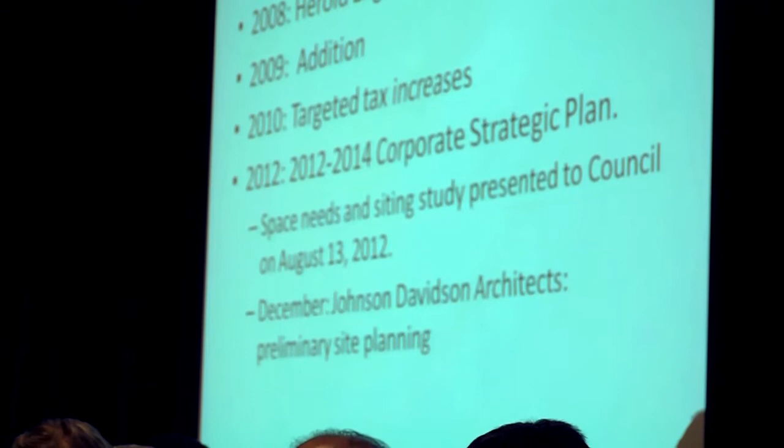In April 2013, we saw a plan very similar to the one we see today, although with a lot less detail. For those who were at that event, some of what I'm saying now may sound like a repeat, since we already knew what the problems were with the hall, so we're just going over it again.

In July of this year, Johnson Davidson Architects was awarded the contract for continuation of this work. Also on July 8th, Council formed this fire hall working group, which Walter Hoogland will discuss more later in the presentation.

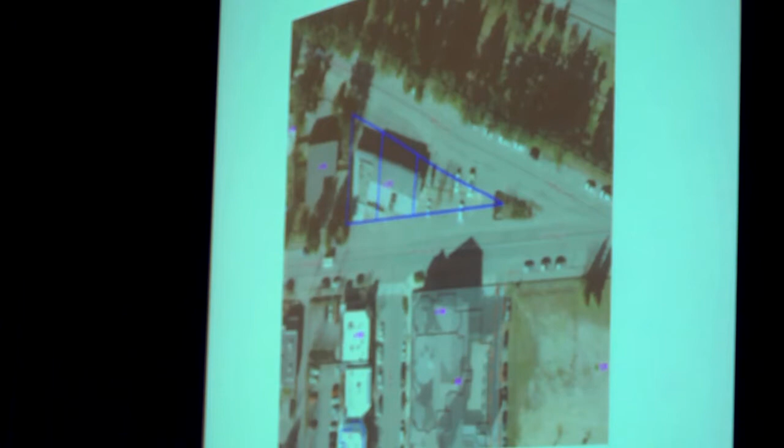Moving on to the discussion of the existing hall. Everyone probably knows where it is, but I prepared this slide for reference. Here we are - it's across the road from the town hall. It's been in this location for almost 70 years, not the same size certainly, but in a number of iterations along the way.

The challenges to this existing hall - we don't need to dwell on them in detail, but we want a fire hall that will still be standing in the event of an earthquake, and that's the first major failure at this hall. It's not up to seismic standards, and it's not what we would consider a post-disaster structure.

The location is also an issue, and Bob Weir will probably touch on this later in his portion of the presentation. Given its location downtown, access is quite limited. The firefighters pull the trucks out onto the road just to wash them. During special events, access is sometimes limited or they simply can't get to it. That's not the ideal location for a fire hall - you want easy access to it.

The power backup for the fire hall is a portable generator. Obviously that's not a good long-term solution - maybe for a house, but not for the main fire hall of a community our size. The communication system is also lacking. If the power goes out, we can send smoke signals, but they'll be putting them out.

On size - a space needs assessment has clearly indicated that although this fire hall was the right size for the community when it was built in the 70s, it's no longer the right size. The fire trucks have grown, we have more volunteers, and it no longer meets the needs of the fire department. We need a bigger hall with more room for the apparatus, and the spaces could be more optimally configured. Kim will discuss that further in her presentation.

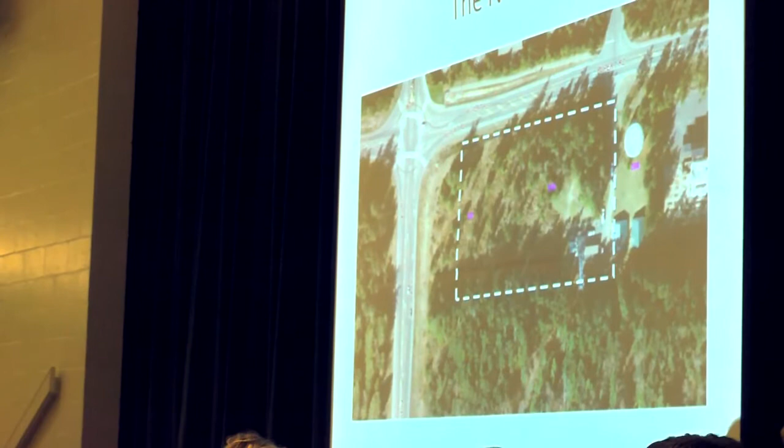This aerial photo does not have the roundabout on it, however we have a bit of the outline of the roundabout. Just the traffic calming effect of the roundabout at this location provides like a low-speed point of access for the apron to leave the fire hall site. So this is a good thing, it's very easy for us to control the traffic.

The other traffic will be stacked up here or perhaps on the inside of Berwick, so the fire department can leave and do whatever they need to do. There's good sight distances in all directions and low speeds. As Luke referred to, the size of the site provides ample opportunity to have training on site, and we see this as a huge benefit.

The co-occupation of the site with the major water storage reservoir and the booster pump station gives us an ability to utilize geothermal heating for this building and achieve long-term efficiencies in the operational costs. This is already a technology we've piloted and have in place for the booster pump station on site. The difficult part of geothermal energy is trying to get water out of the ground so you can extract some heat from it. Well, our water department does that all day long.

We produce typically in excess of 1 million gallons a day, sometimes several million gallons a day. It's very easy to just divert a little bit of that water through a heat exchanger, and we can use that to heat the building. So that brings us some long-term operating advantages. Timber from the site can also be harvested and milled and used in the various architectural finishes of the building. We're hoping to see some of that.

Now, in looking at the site, some of its advantages can also be seen as disadvantages. This is an undeveloped site, so there are going to be associated site development costs with it. It's a large site, and if we want training on site, we're going to have to build it. So it's a negative, but it comes with a positive.

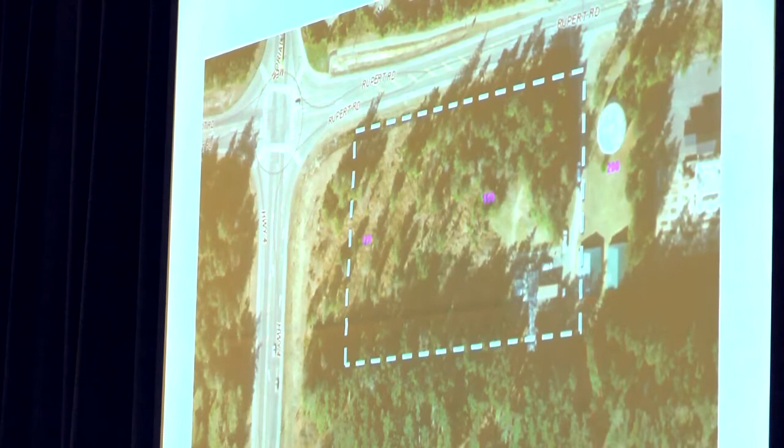And I had just prepared a few notes on Walter Hoogland. I don't know whether the last meeting was appointed or not, but anyway, I'm just going to take a minute to introduce Walter.

Walter Hoogland was appointed by council to be the project manager for the new Fire Hall project. Walter is an upstanding and accomplished member of our community. He's resided in Qualicum Beach for 13 years with his wife Marilyn, and he understands the community well. In 2011, he received the Above and Beyond Volunteer Award. In 2009, he was Qualicum Beach's Volunteer of the Year. He has chaired the Fire and Ice and Family Day committees. He served on the Qualicum Beach Advisory Planning Committee and is currently involved in the Kiwanis Affordable Housing Society redevelopment initiative of First Avenue.

Walter has 40 years of experience in construction development, and claims to be semi-retired as a project manager for both building and civil contracting. He's built commercial buildings, schools, shopping centers, care facilities, and closer to home, he was the project manager for the Qualicum Beach Memorial Golf Course Clubhouse, the RDN offices in Nanaimo, and Family Place, Arrowsmith Lodge, and Coakley Manor in Parksville. Council recognized that Walter would ensure the project be carried out in an efficient manner and that the community would get good value for money.

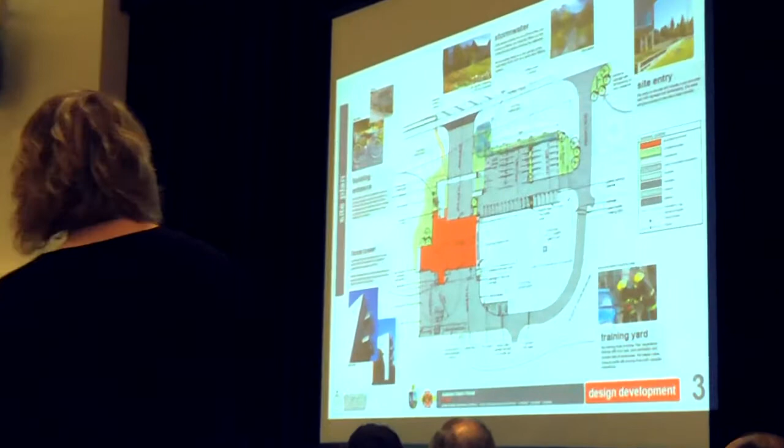I won't take over a whole bunch of your time here, but I will start by taking a look at the site plan. Last time you saw us, we'd been looking at various versions of where to put the building, how to access it, how to make sure emergency vehicles can get out to the road the way they need to be, and how we make sure there's no conflict between the public coming to the building, volunteers coming to the building, and those emergency vehicles leaving. What you see in front of you is the design development version of that. We've taken it into this next stage, and I'll just walk you through the site a little bit.

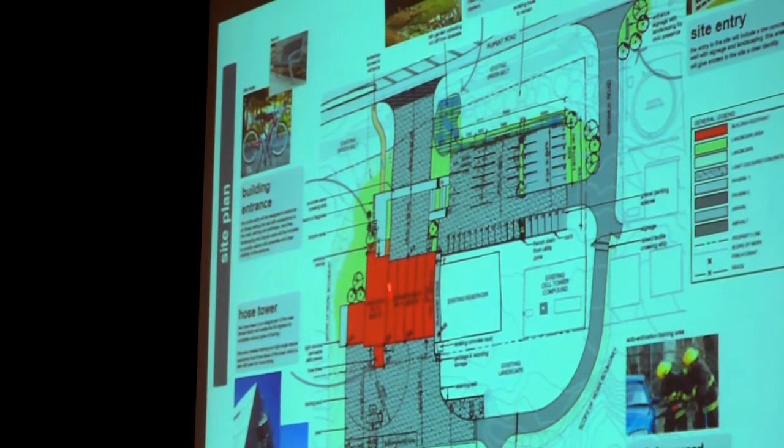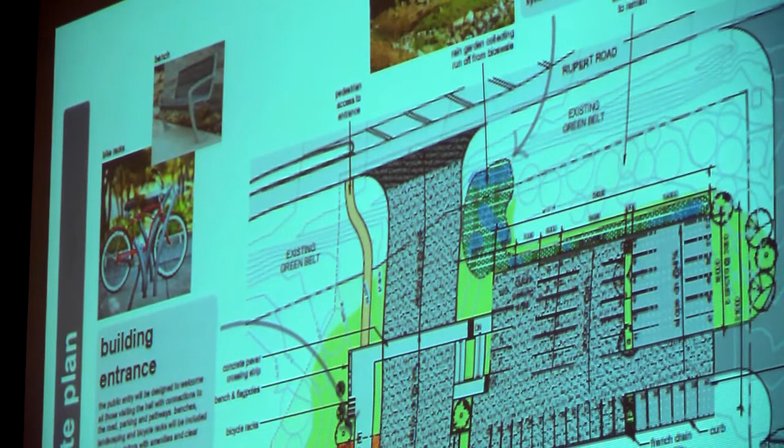What you see in front of you here is we have two exiting and entrance points off onto Rupert Road. The apron, the front apron, is where emergency vehicles only will exit and sometimes return back into the bays - it really is a fire department only kind of access. What it needs to do is make sure we have enough of the grade to get us down to the road very quickly without causing any bumps or obstacles along the way. We need to make sure we take you straight out perpendicular to Rupert Road so those emergency vehicles can take off in either direction without endangering public safety or the safety of the fire department.

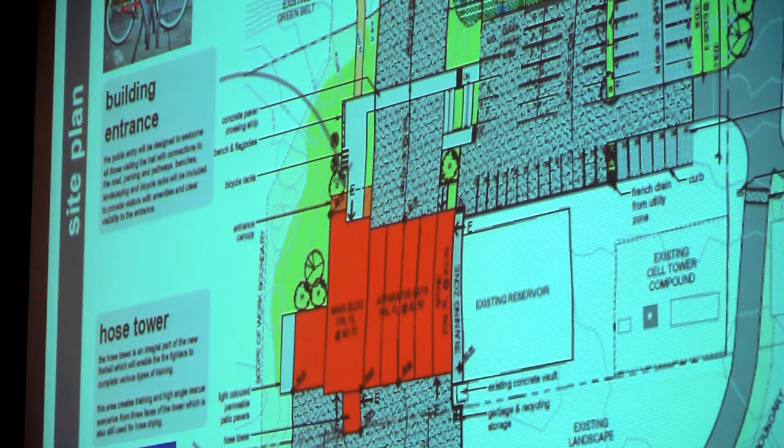One of the keys to all of this is positioning the apparatus bays, which you see right here, located just adjacent to the reservoir. This represents the existing water reservoir, and what we were trying to do is make sure we tuck the building as close to this as we could, because we're actually going to use it to our advantage in the very near future when I jump into that for training.

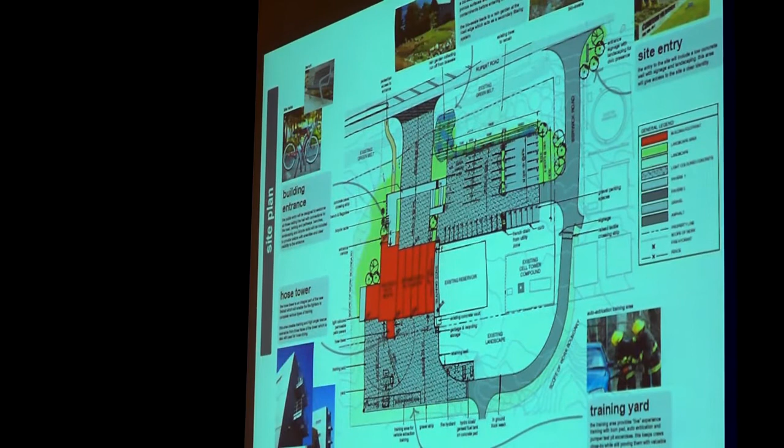It's also built to post-disaster standards, and it's very important to remember that's one of the key issues in the difference between the fire hall you have now and the fire hall that will be built as a result of this proposal, hopefully. So what that means is the building is actually built to 1.5 times greater a seismic force than your average building.

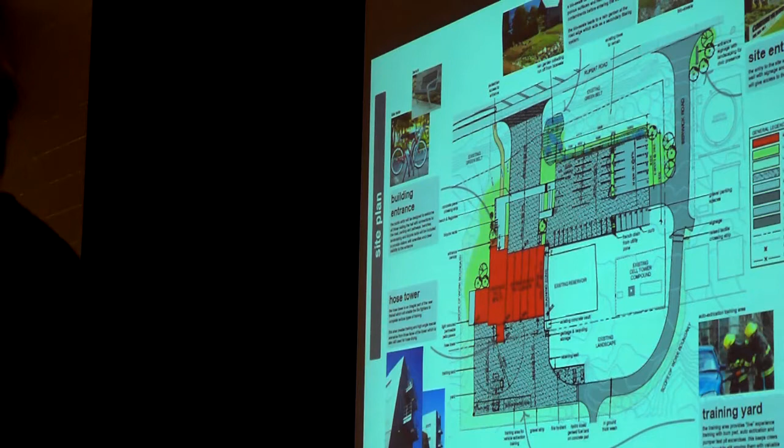So the building you're standing in now, some people may say, well, why don't we use this for training? Why don't we use this for various functions the fire department can use? Well, we want to make sure that when an earthquake happens, the building is still standing. This one may be, it may not be, but that building will be. The idea is we design it to those higher seismic forces to make sure people can get out, fire department can get out to help all of you, but also that the building itself is standing and still useful.

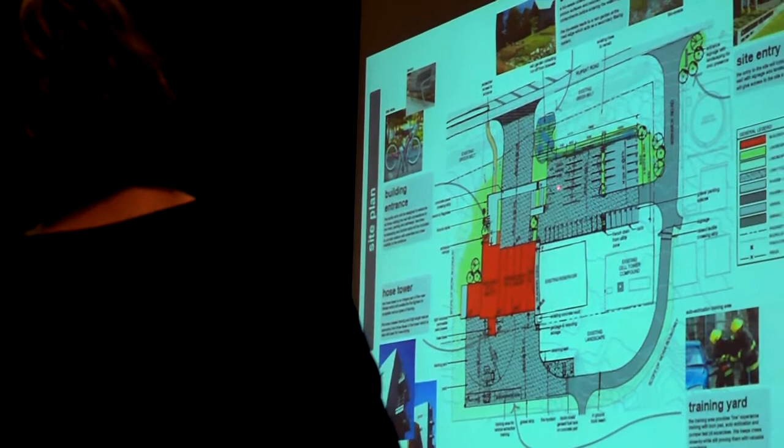In addition to that main exiting, and sometimes return for emergency vehicles only, we have the access to the site. The reason we separated these is we wanted to make sure there was no conflict between volunteers arriving - the parking you can see adjacent to the apparatus bays, so they come quickly in through this door - and that's also where the public will arrive. So there's no conflict with people arriving and exiting through the same entranceway.

Sorry, can you go on the other side? Sorry. Oh, you're gonna - yeah, not good.

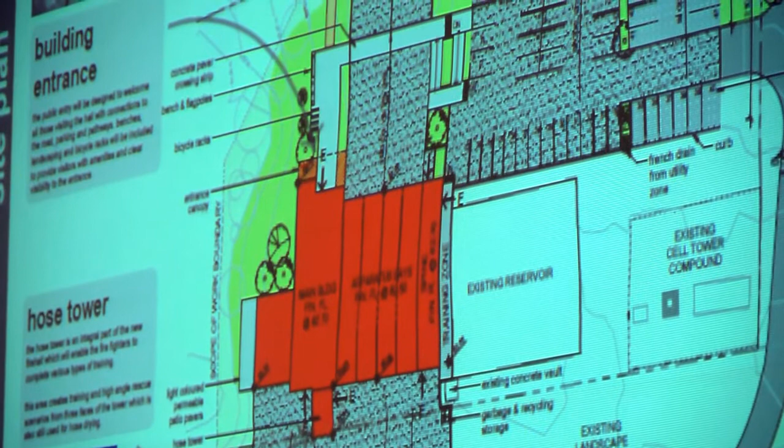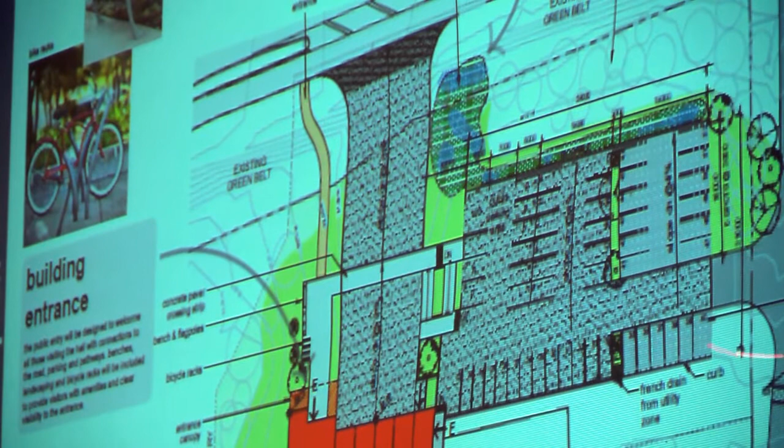What we were really focusing on here from a planning perspective is trying to make sure that this green belt was kept intact, so we want to use a lot of the existing landscaping that's there now. We do want people to come to the site through the secondary entrance and this continuation of Berwick Road, which will eventually take us back to the training yard.

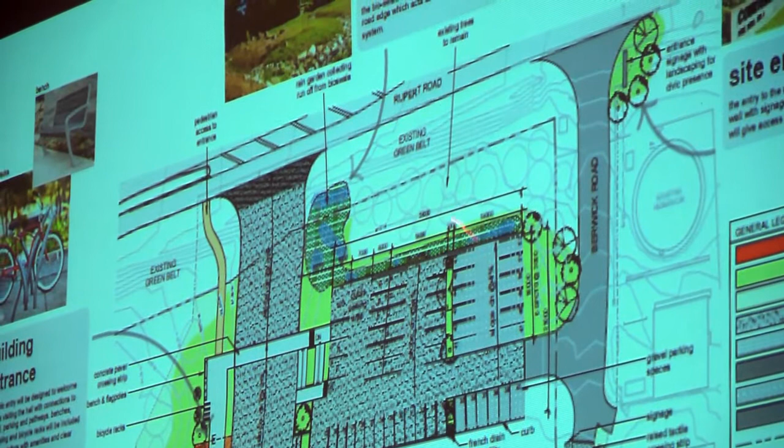So we've got parking towards the front, quick access for volunteers into the bays, parking for the public which takes you across the bays and directly into the entrance, and then a training yard towards the rear of the hall. This looks at taking the more industrial side of the fire department and their training and placing it away from where the public accesses and away from where parking is, keeping it towards the rear of the hall. This is also where we've located the hose tower.

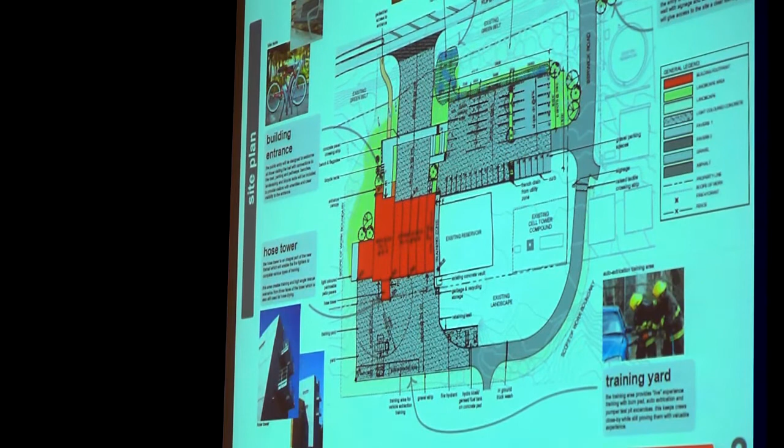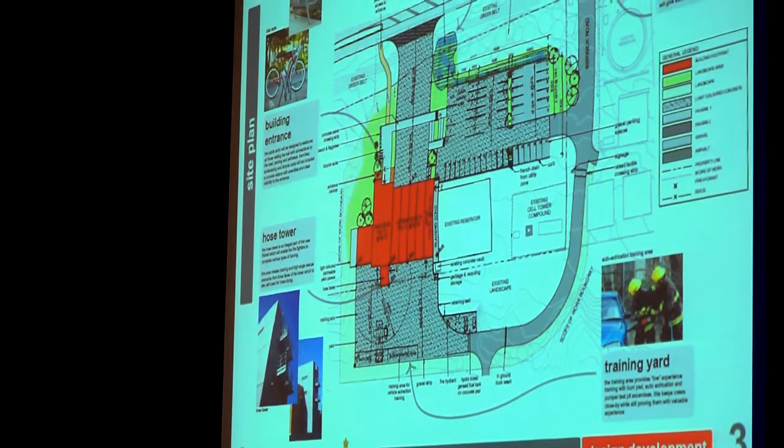The hose tower is traditionally used for hose drying, which it still is, but it's also got a multi-purpose use. So we will design the interior for that to have confined space rescue within the shell of the hose tower, but 3 sides of that hose tower will also be used for training for the fire department, and they'll be able to use it in a variety of ways. We'll design it with certain obstacles that suit their needs in order to make sure that training on site can be as effective as possible. We also need a certain distance off that hose tower, 20 meters, to make sure that vehicles can be positioned around the hose tower, and again, that training can take place.

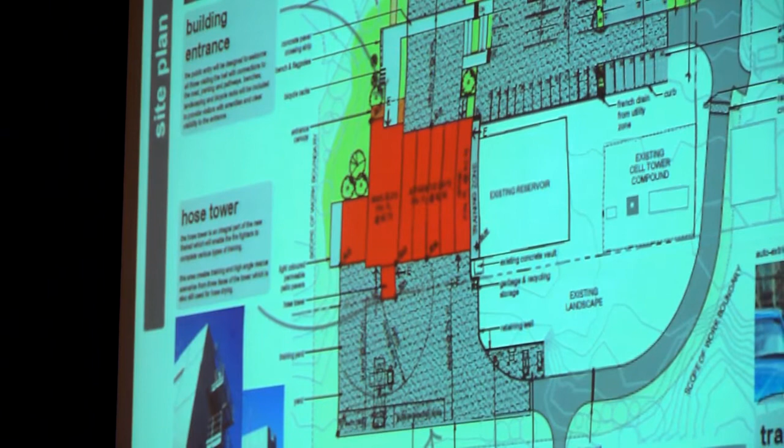A little bit more, we have some of the services back here as well. This is a very key portion here, the emergency gen set. Unlike the building that you have now, this building will be served by an emergency generator that will run the entire building if power is down and services are down. So we have a gen set here, we'll run that right now for 72 hours without refueling.

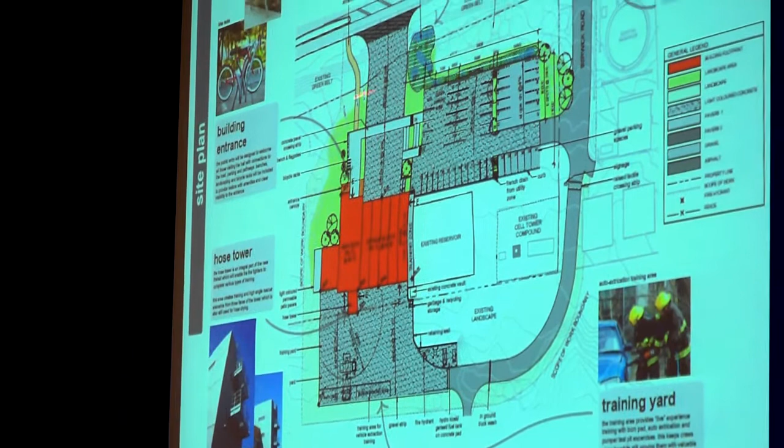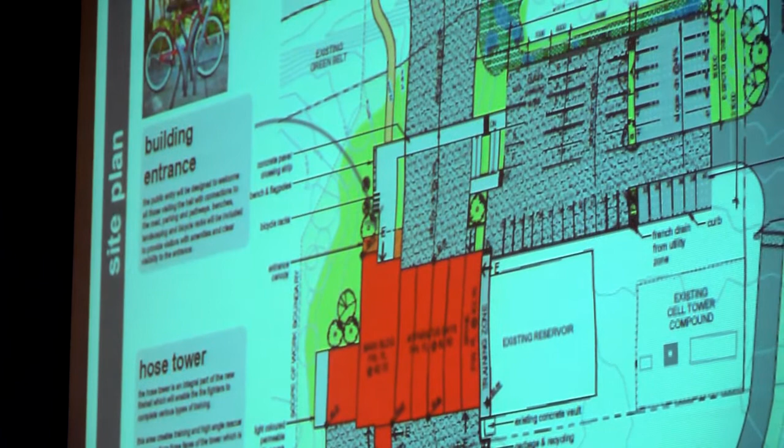We've also tried to create a nice public entrance towards the northern side here, which gives us access to the road, but also access to parking here. The distance between that pedestrian walkway and the apparatus bays is 20 meters, which gives the fire department enough time to get out of the bays fully, doors could drop, and not infringe on the pedestrian walkway across the apron. So there's a good distance there for pulling vehicles out of the bays and washing them, doing maintenance on them, which means these guys are sitting in the middle of the road right now. In this case, they'll be able to sit on this first part of the apron without impacting the pedestrian walkway and then head out onto the street in a safe manner.

How do we operate this guy?

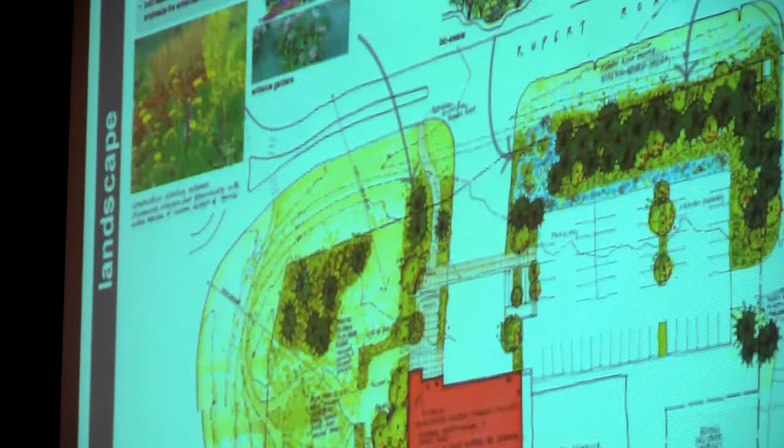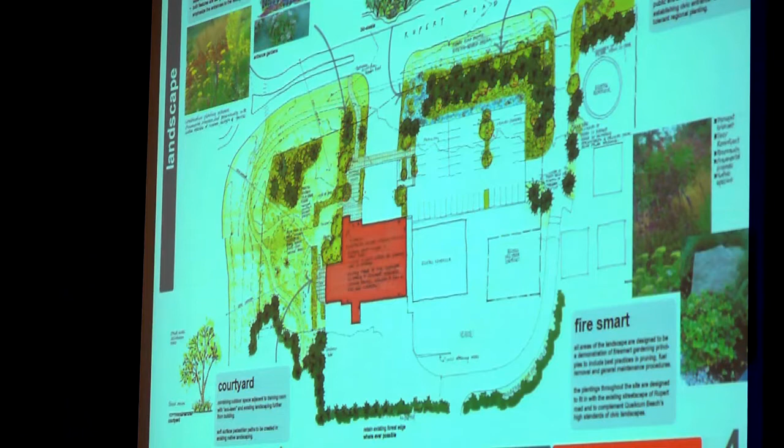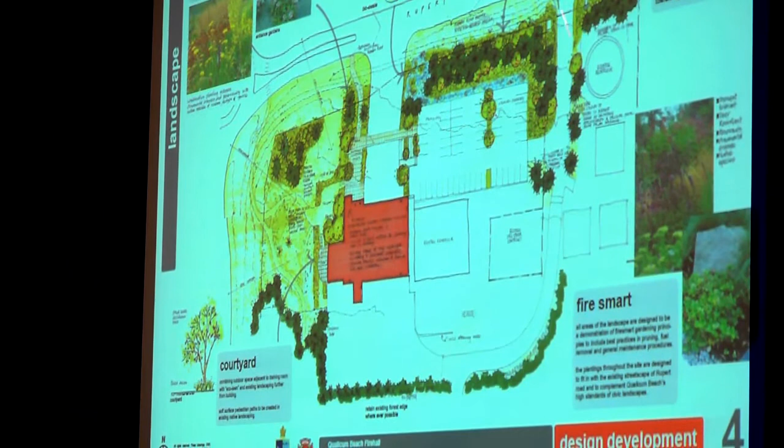I won't go into this in too much detail, but Victoria Drakeford is here as our landscape architect, and she will be able to take you through the landscape plan in detail. What we really wanted to show here was that we are focusing on trying to keep the existing forested areas on the site, but also, where we have created development, enhancing that area through rain gardens, using drought-tolerant planting, regional planting, and trying to create this as a bit of a demonstration area. We'll also be making sure that our entrance to Berwick Road and the entrance to the parking in the fire hall on this side will meet the town guidelines and ensure a nice civic entry as you approach the building.

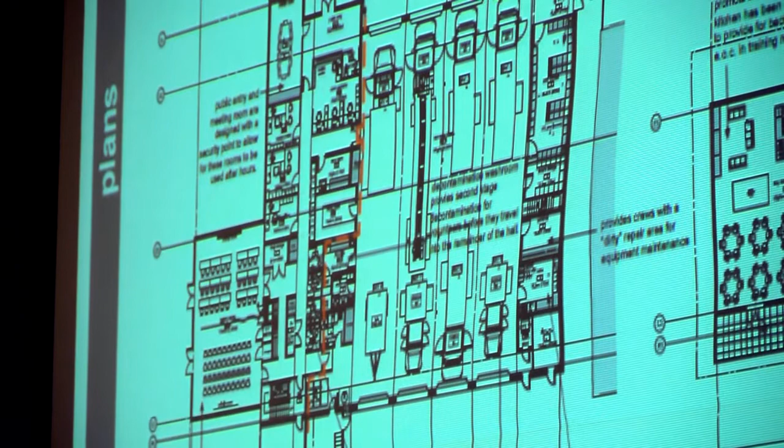Okay, onto the floor plan. As everybody before me has said, the floor plan has taken some time to develop, and the reason for that is because it has been really well tested. Each member of the group, or each faction of the group especially, has had different concerns. That's the great thing about working in a community group, you are able to ensure that everybody comes with a different perspective and tests the plan as it comes together. So each one of these spaces has really gone through quite a good rigmarole as the building has begun to take shape.

As I said before, one of the key elements is making sure that we have apparatus bays that are big enough for the current vehicles and for those projected to come, allowing the fire department and their crews to get around those vehicles really safely.

I don't know if anybody had a tour of the existing fire hall, but you can see now that fire engines are tight to the front. There's no room to get around them, and equipment is stored inside the bays.

One of the goals here with these bays is to ensure that they can store different kinds of vehicles in different positions, so vehicles can head out through the rear yard or through the front as well, but there's also room to get around them, to maintain them, making sure access for those vehicles is safe and fast.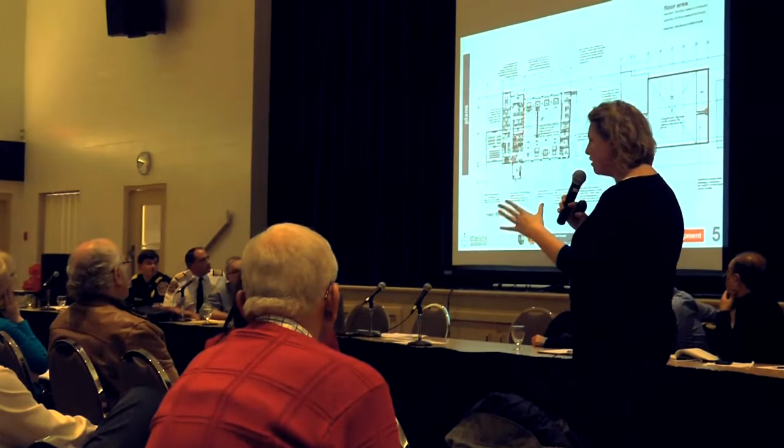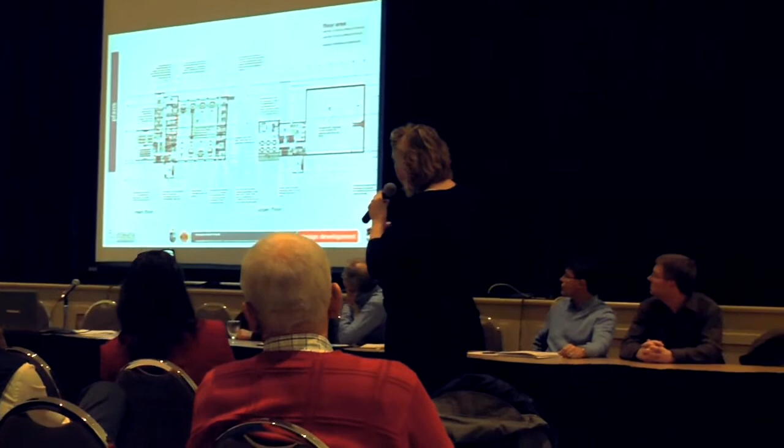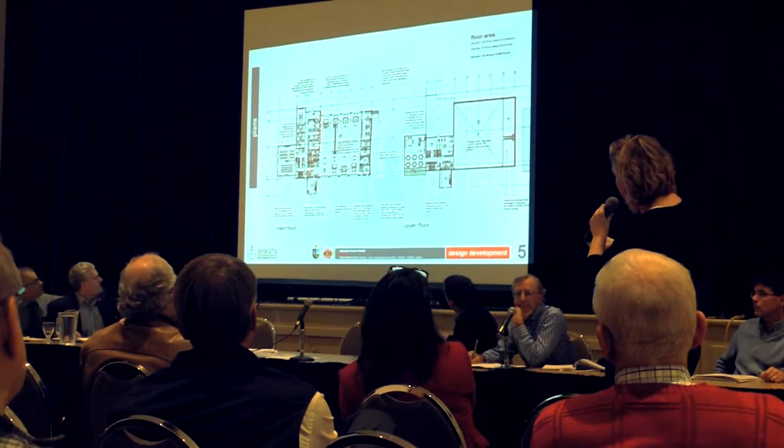In addition, what you see along the left-hand side here is what we call the spine, and those are some of the most important operational spaces for a fire department. Right now, gear storage is actually stored in the bays. What we do here is, in order to keep contamination down, we have a room directly off the entrance that volunteers come through from the parking area, which takes them right into gear storage. So we have a rip and run, or dispatch area, right here, directly into gear storage.

All that room is controlled from a humidity perspective, so they have racks where the turnout gear sits, and it can dry out while in the room. It's expensive equipment, so we want to make sure they have the opportunity to maintain it. Grab your gear through the second door and out into the bays.

What we really want to do from a structural perspective is, although we do have some columns, make sure there's a line right through the center of those bays to get everybody from gear storage straight through the bays into whichever vehicle they need to go to.

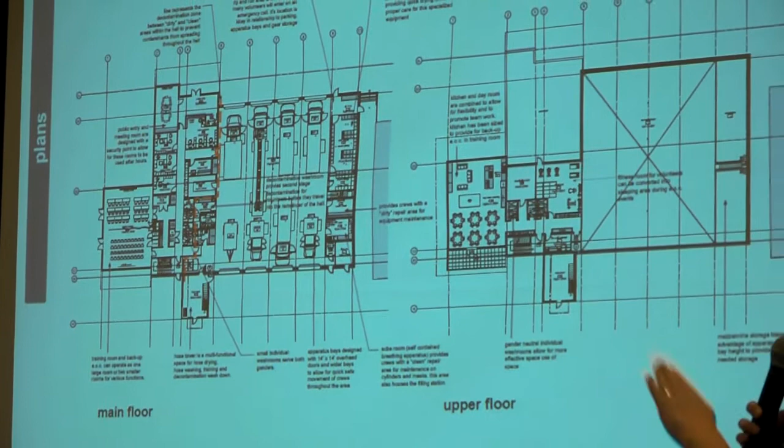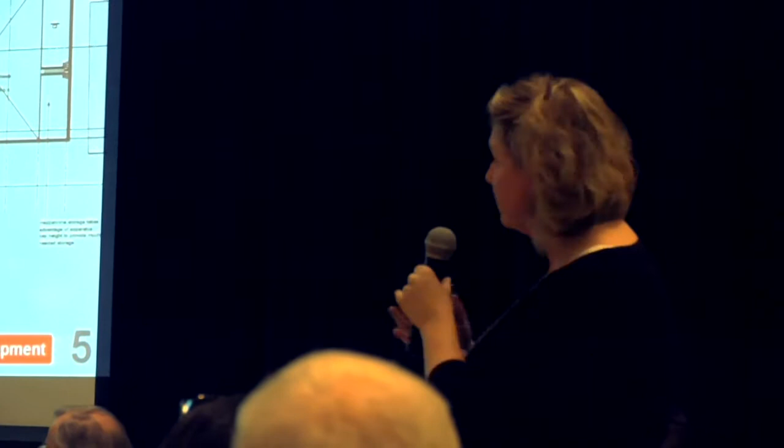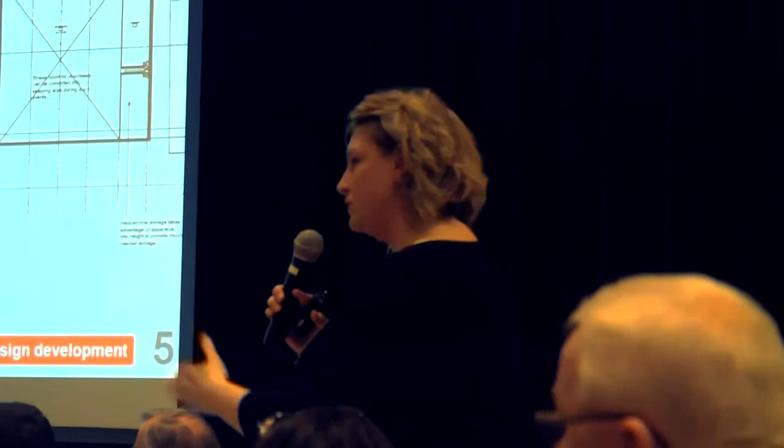In addition, one of the key things for the future is making sure we have enough room for additional gear storage if it's ever needed. One of the things we do here is position a storage room directly adjacent to the gear storage, so that in the future it can be expanded very easily. Otherwise, gear begins to go out to the bays, you lose your decontamination, your bays become cluttered, and you lose that advantage of keeping things well organized, clear and clean.

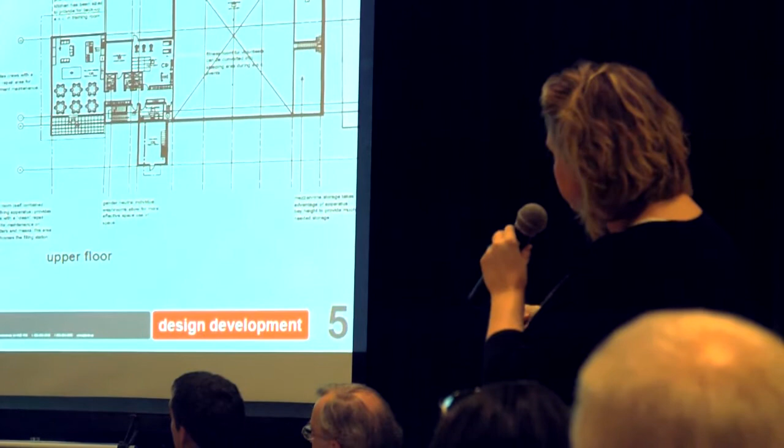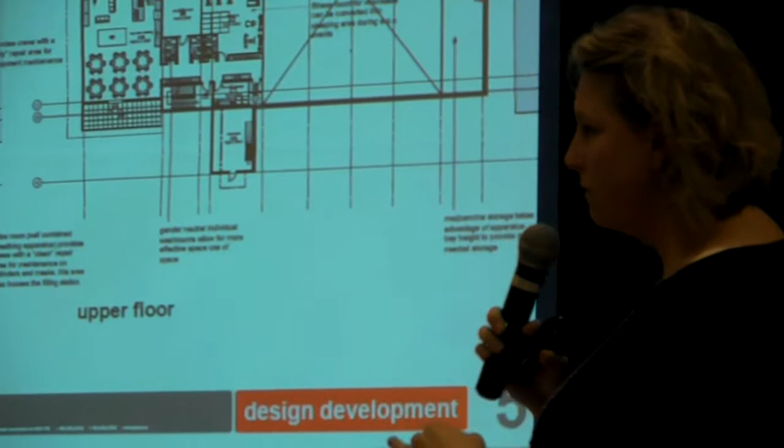In addition, two key spaces along this side are the workshop and the SCBA room. SCBA looks after breathing apparatus - it gives these guys a small room, but it's what we'd call a clean room. It gives them the ability to fill cylinders, maintain their masks, hang them, wash them, dry them. Nothing elaborate, but enough room to do that and deal with the equipment they have here.

Again, to fill bottles they have a filling station, to take care of that aspect, which they don't currently have.

The workshop side, just above here, is a smaller room, but it allows for sort of dirty maintenance. We don't want to mix the two - we want to keep decontamination separate and make sure they have a clean room to do what they need to do in. The workshop is for general work on the trucks, work on the equipment - things that might take them and their equipment out of the hall can now be done inside the hall. Again, not a big space, but enough room to do what they need to do for years to come.

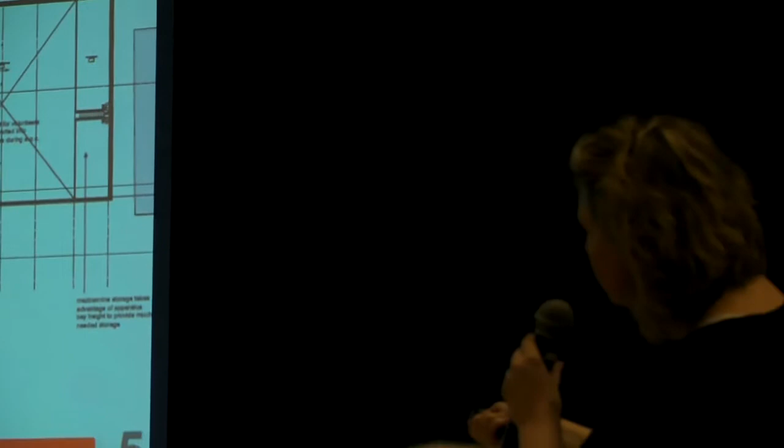They can do that in the hose tower, which has a wash down, and then they have a utility room, which has a gear washer. Take off their gear, put it in the gear washer. There's two small washrooms here, called decon washrooms, directly adjacent to the apparatus bays. There's a shower in there, lockers for a change of t-shirt and shorts, meaning they've had a second stage of cleaning.

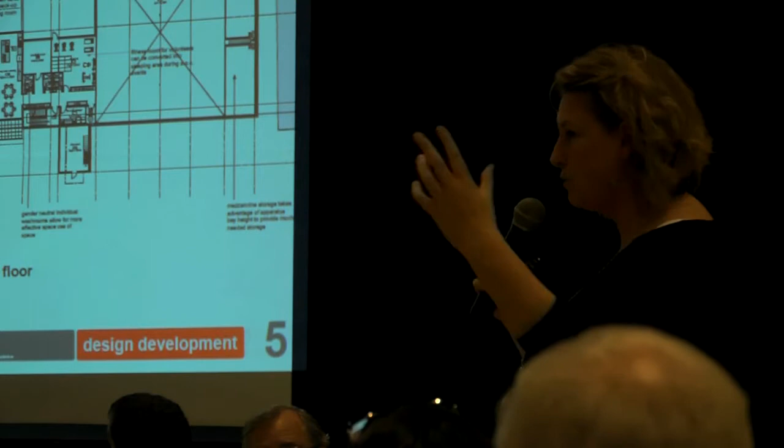Then they can go back into the clean side of the hall, head upstairs, shower down again. Don't go back to your families with contaminants on you, you're not spreading it into your own car. It gives them the ability to walk through those stages and become decontaminated, basically, as they move through the hall.

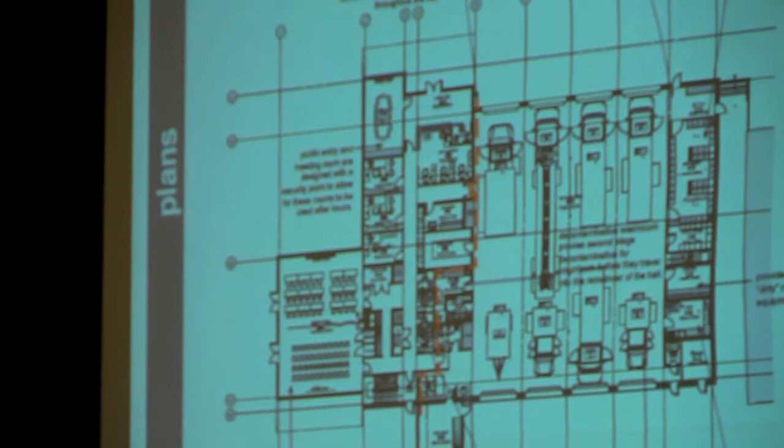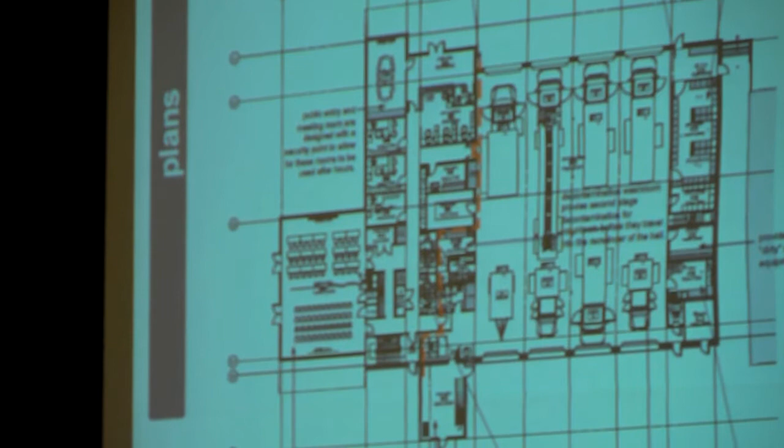So adjacent to that, we describe some of those spaces. In the hall portion, what we're looking at here is a suite of rooms at the front: a small meeting room, reception, an entryway, and a security point. This enables the group to shut down the hall and let other groups access that space at the front without the fire department having to be present, or even if they're there and get called out, the rest of the hall is secured off so nobody's wandering through equipment or taking the trucks out for a ride. So that gives them the ability to operate that, and that would be city or town-wide as well.

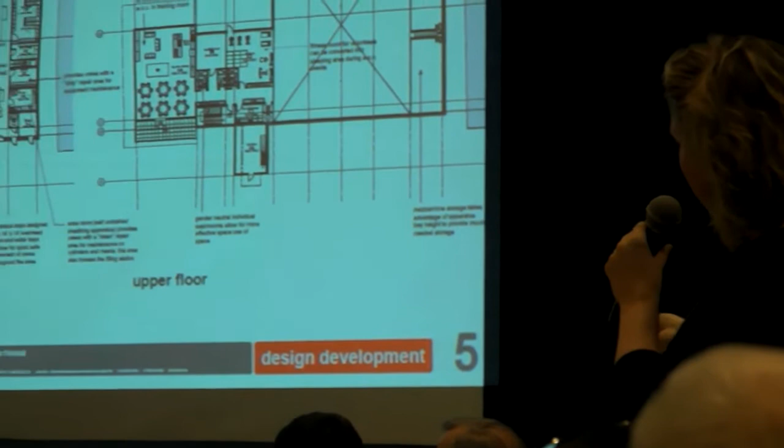A couple of small offices here for full-time staff, some workstations, and then we're looking at a training room. The training room operates not only as a training room for the fire department but for other uses and other groups, and it also acts as a backup EOC. It will be outfitted to act as an emergency operations center.

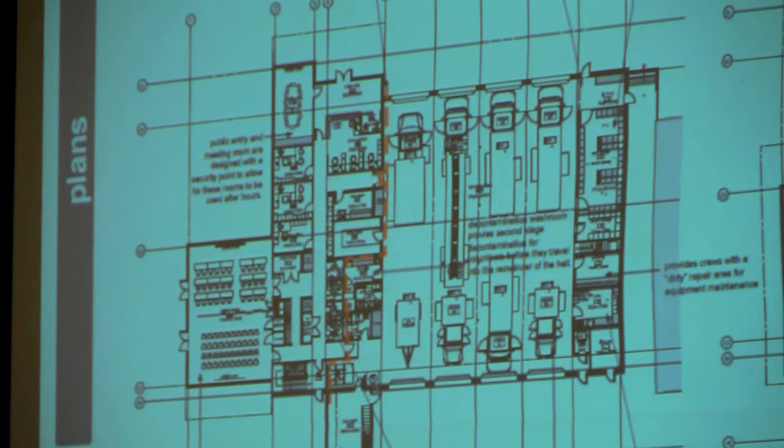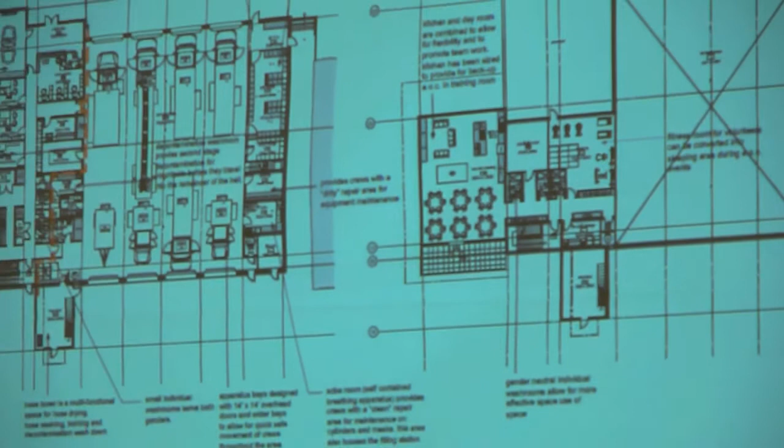One key thing is that when this is in operation, you have an emergency, RCMP comes, fire department's there, search and rescue, ambulance, any other emergency services group can set up down here with all their desks and equipment, and still come upstairs, use the kitchen, have a dining area, have a little breakout space. If we didn't have these two spaces, there's no way this building could operate in that function, because you can't set up and unset up repeatedly. So we're trying to make sure these spaces operate not just for the fire department on an ongoing basis, but for secondary uses.

Upstairs, nice and tight. We kept the lines really tight, trying to follow the structural lines outside to keep construction economical. We have the day room, kitchen combined with a dining room upstairs, the volunteer area, and a couple of gender neutral washrooms. All of the washrooms in the hall are gender neutral.

People often ask me if I'm trying to promote people showering together. No, that's not what I meant. It means we just don't have spaces set aside for one and the other. It's just like your house - everybody can just take over one washroom and go from there.

No judgments on that. But the fitness room is to one side, which has a bit of outdoor space towards the front. And then we just have a few ancillary spaces: a small utility room, a little bit of mechanical, and circulation. And again, like I said, you can see that hose tower towards the rear, which would have a couple of stories, and it's actually quite cool when we get into it.

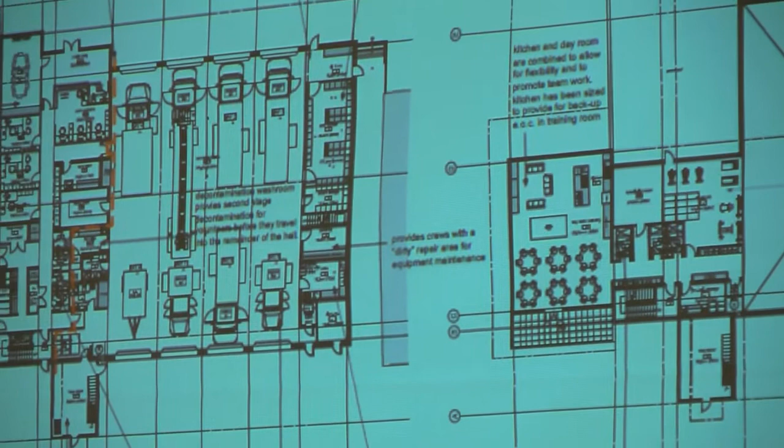We have training opportunities off the front, off the roof, off the side. Nothing elaborate, but it's just in the way you take normal materials and make them into something really useful.

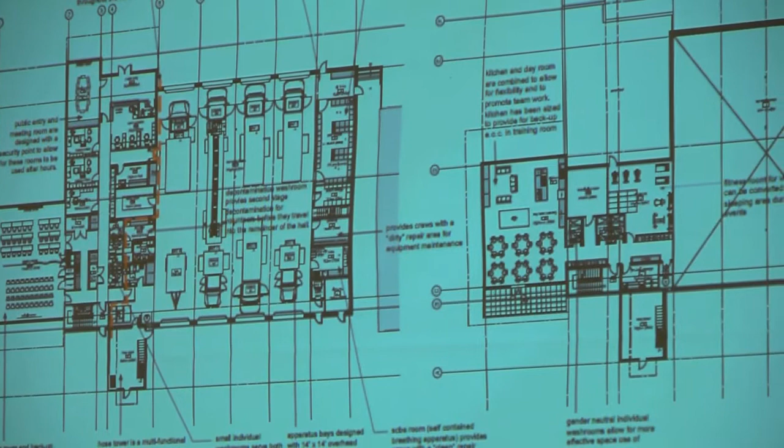In addition, above the spine area here, we've taken advantage of the height of the vehicles, which you do need in order to get overhead doors, the exhaust systems, lighting, and all of the necessary equipment for the vehicles. We've taken advantage of that height and provided a ceiling over these spaces and given access to mezzanine storage. That's for future use - you want to build in some future space because this is designed to be a 50-year building, but we don't want to build in so much that it's excessive for this period.

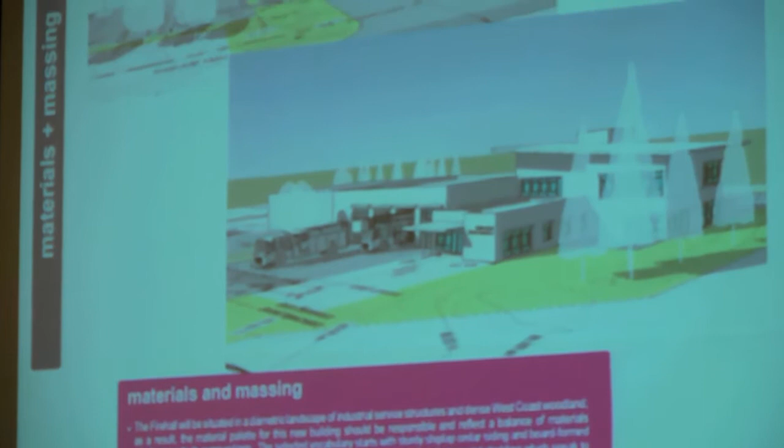So then we started to look at form and function. You can see that we're starting to add windows, flat roofs adjacent to the reservoir, so the two massings meet, with a range of materials that everybody is still discussing and looking at. Very interested to hear all of your comments on that. But we've got a nice low-story element to the front, which will also be built to provide the option to expand in the future over top of that - always better to build up than out, more economical in that perspective. And then you can see the second story on the top side.

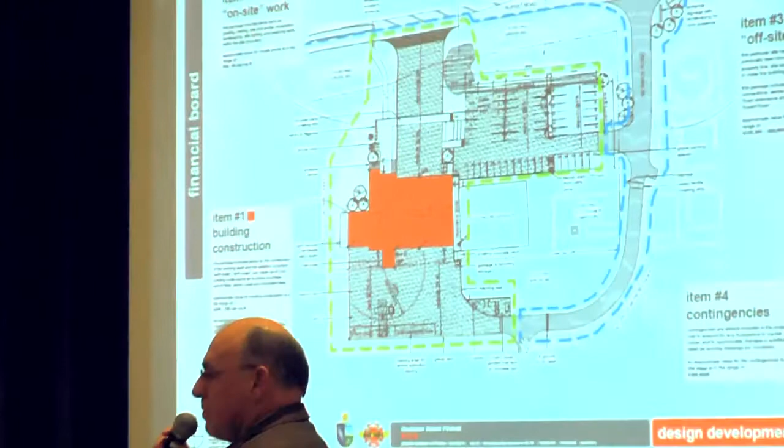Yeah, see, we worked together really well. The working group has really learned how to get along. We also know their challenges.

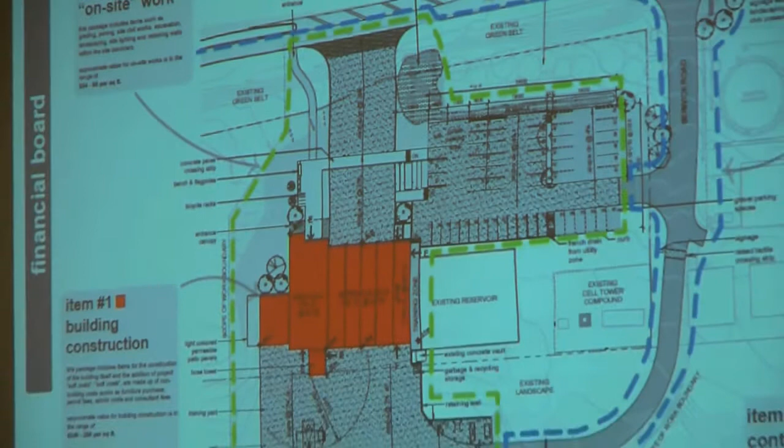If I was to look at, for instance, Nanoose Bay, a 3-bay fire hall, just the hall itself, and that would be item number 1. So I looked at Nanoose Bay that way, and I said, okay, I don't want to look at the land around it, because the land on all the projects are different. So that building in Nanoose Bay, what did it come to? It came to $245, 200, small writing - I do need better glasses. It's 245, or around $245 a square foot.

Just for what's red, okay? Had a look at the Gabriola one - it was $282 a square foot, or $262 a square foot. And then went to Central Saanich, had a good look at that, and they came in with a cost for that area around $276 a square foot.

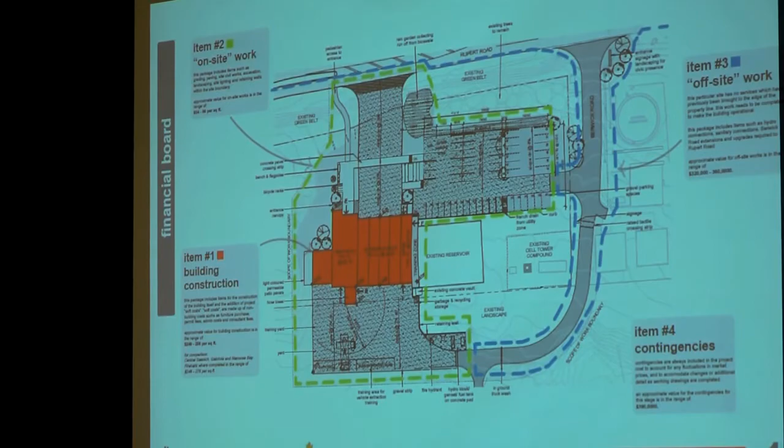Now these costs are just the building and the soft costs that are involved to build that building. That meant it included the architect's fees, the reports, the geotechnical testing, and all that kind of stuff. So I put that into the building costs because predominantly those soft costs will go there. There are some soft costs that go to the land, and that's a different thing.

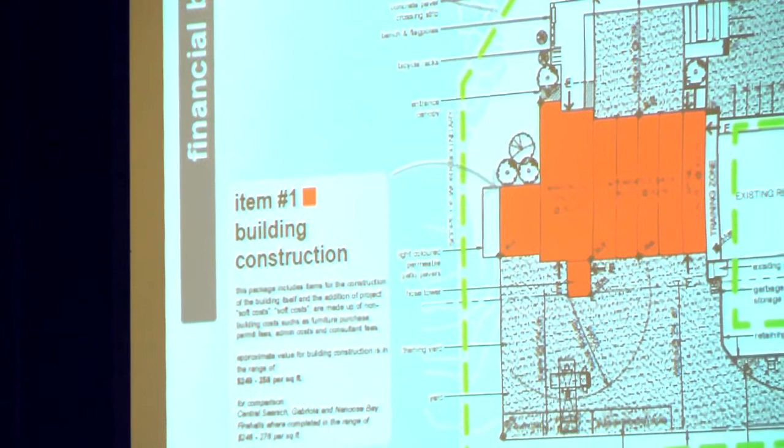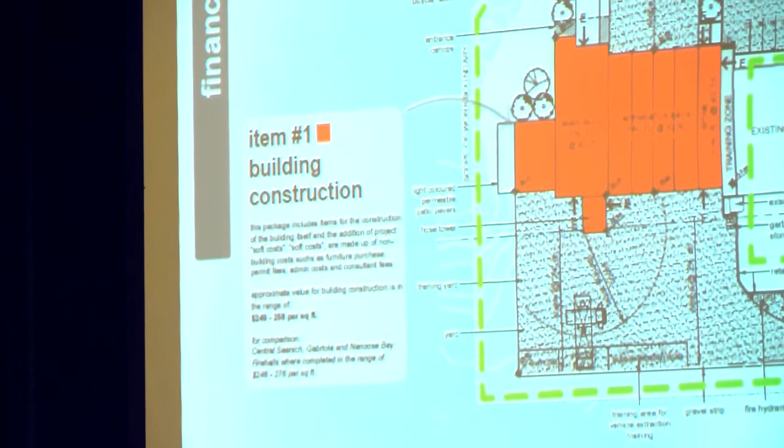So in the comparison, okay, we came up with a number. It's on the board, I can hardly see it. It is 200 and... item 1, yeah, it's item number... so I came up with a number of 249 to 258, somewhere in that area. I based that on my experience, based on looking at all these other buildings.

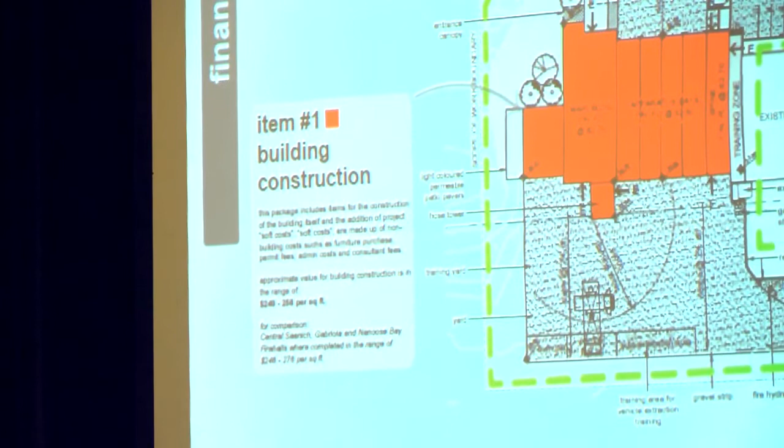So that tells me, hey, first of all, there was a trend, because the buildings I looked at were done at different times. One was tendered in 2011, built in 2012-13. Another was tendered in 2012, built in 2012-2013, and they're all completed. So the building costs, we can get pretty close on that.

When it comes to the site, it's a real challenge. If you take Parksville, for instance, those costs are going to be very minimal because all the services are there, the land is there, there's a building there already, and they simply had to put on an addition. You look at Nanaimo, there was a building there already, and they just had to take it down, use the same services, made a few adjustments to the parking lot that was there, the grade was there.

The costs were quite low. I would think that if I was to apply those costs in those two buildings, it would be around $27 a square foot for the building, for that comparison. Had a look at Gabriola, and those costs were around $31 a square foot. But Gabriola had a flat piece of property, and they didn't have to do a whole lot of stuff to get what they needed. I'm not quite sure about the services there because I'm not sure whether that was included in the tender. However, I do know the breakout cost for the site work from Gabriola was around $31 a square foot, quite low.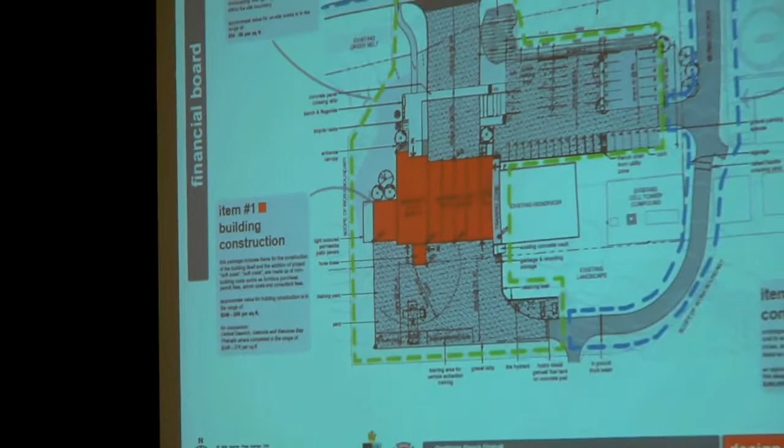And then we have, this is the bummer, we have to have a contingency. Because we were looking at the job and all these other projects, and also started seeing there was a little incremental increase in the square foot cost just on the building alone. Every year it went up a little bit.

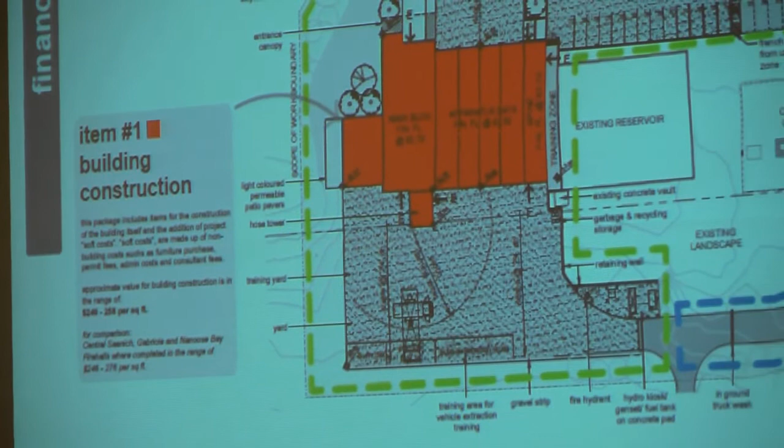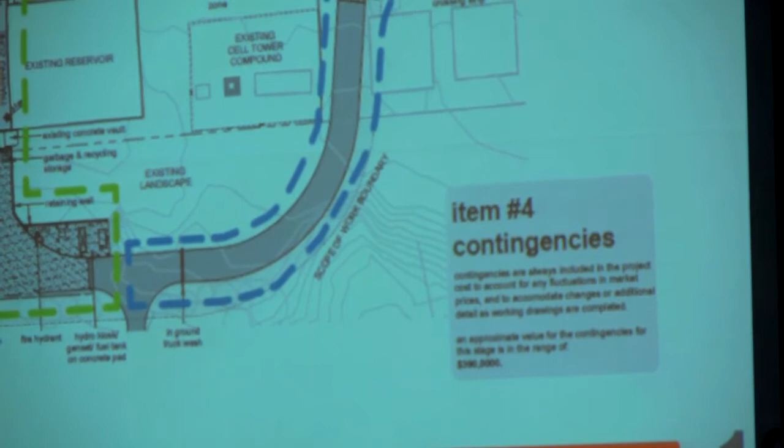So when we go to tender 2-3 years later, I would suggest we're going to probably be spending a little bit more than Parksville, Nanoose, Central Saanich. So we have this thing called a contingency.

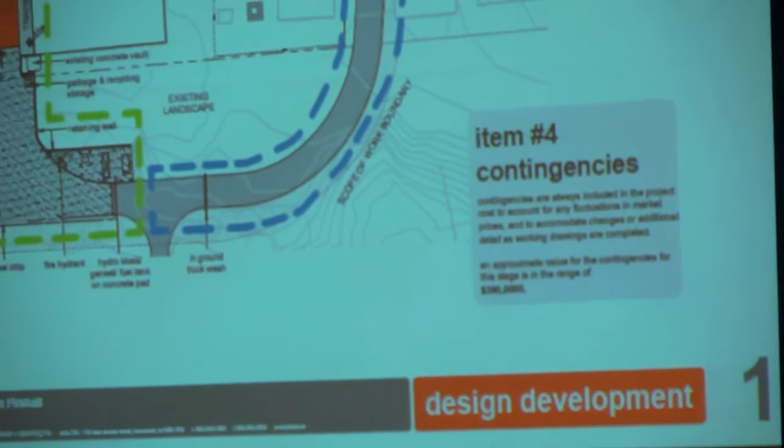So when we go to tender, we might be lucky that there's a sale on. But we also may have to buy it at what the market is.

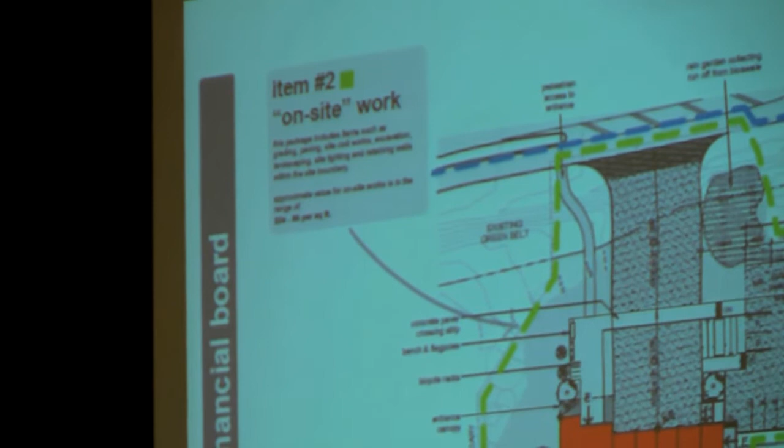Jason, who's on the working group, says, oh boy, I'm starting to get a lot of projects. I'm getting some real dandies. I'm going to start one up in January. I got another one starting in 2 weeks, and the industry is starting to get busy.

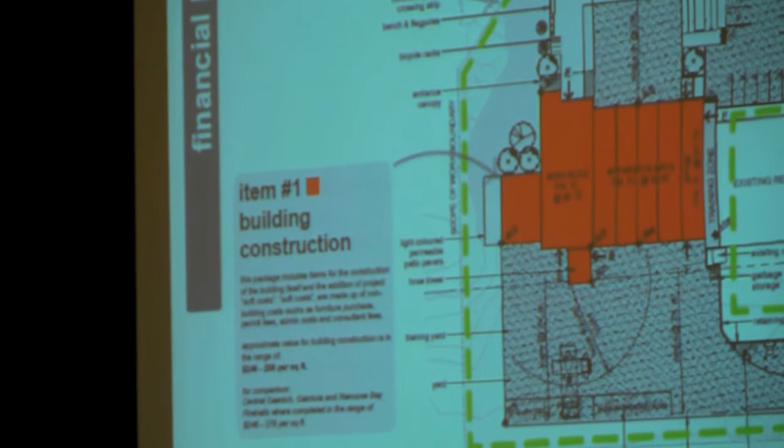I'm the guy that gave a number, but we are looking at an industry that started to incrementally increase. So be aware that we have to have that covered. So we got $390,000 just for that.

So when we're looking at the budgets, it could get a little scary. In a couple of minutes, John is going to let us know how we're going to manage that. But the capital costs are real. We're not building junk. We're building a real good building that our community deserves, and it is going to cost a few dollars.

The other thing we're going to be looking at over the next little while is we want to get into the ground, and we want to get into the ground soon, because that also tells a story. And the story is, that's where the biggest risk is: what are we going to find?

We have maybe a dozen holes in the site telling us a story. But once we clear that land, once we get that 9 feet of dirt out of there, it's going to give us another element of knowledge, and perhaps at that time the contingency could be reduced. So as we go through with this project, we're going to have these different things affecting our cost.

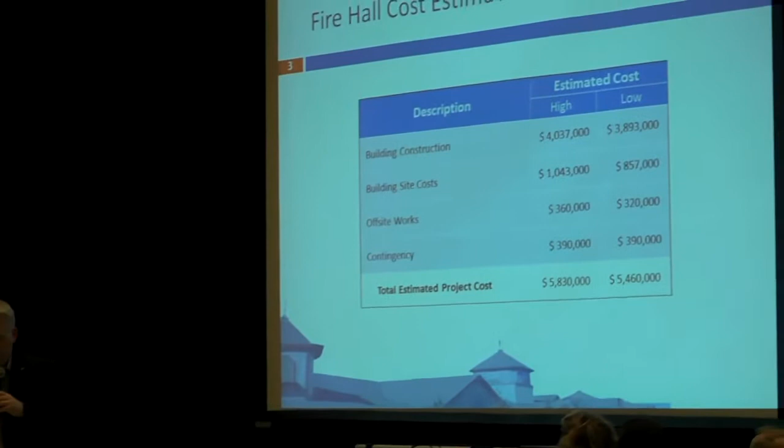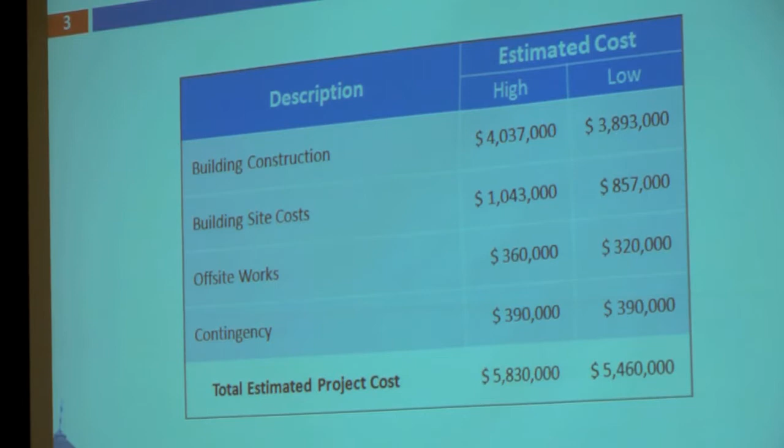Just to summarize what Walter stated in terms of the costs in the four areas he identified on his screen, I summarized them here. He had a range of square footage costs, and when you multiply out the square footage, that's how we got to the 5.8 and 5.5 range. You can see the breakdown of the cost, with the building construction component being in the 4 million range.

This is not a budget meeting, although the town is looking at its financial plan on Monday. If we have time at the end, I'd certainly be happy to go into more details of the budget. But for this meeting, it's just here to put in context the kind of dollars I'll be talking about on some of the slides. Our total budget, net of reserve transfers, if we bring any money out of reserves, is almost $12 million.

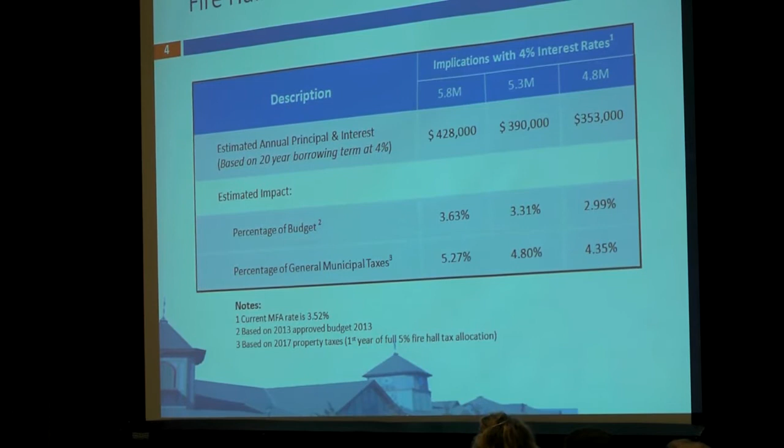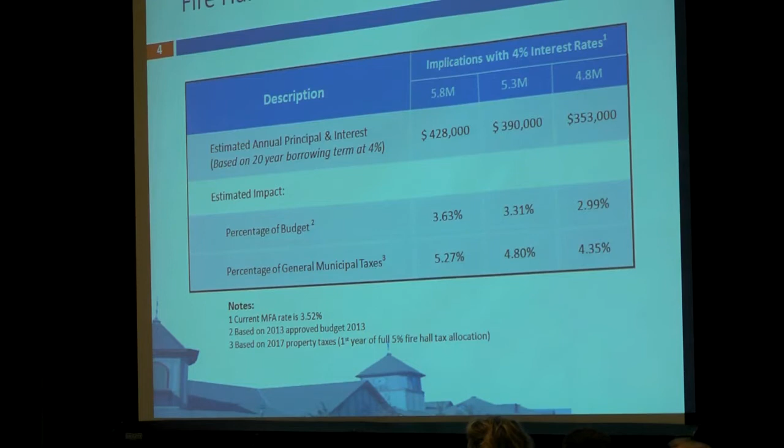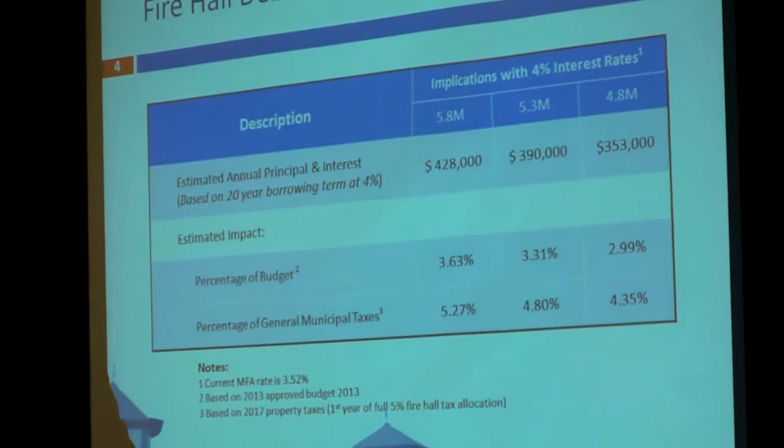So going to a slide on the building, I'll reference back to our total budget just to tie the two together. What I did here is based on a 20-year long-term debt at 4%, with a footnote that the current MFA long-term rate is 3.52%. Based at a 4% interest rate and borrowing 5.8 million, then another column of 5.3 million and 4.8 million. The reason I have those three columns is, as Walter identified earlier this evening, we are optimistic about getting government grants, but we don't have anything at this point, and we can't get serious about our applications until the project advances on the detailed design.

So those are some numbers, and what I did is take those 20-year debt payments and calculate what percentage of our budget they represent. Going back to the budget of almost 12 million, this shows the full borrowed amount of 5.8 million. The payment would be approximately 428,000, or 3.63% of our operating budget.

I also looked at how that relates to our property taxes. Based on the full 5.8 million amount, that's 5.27% of the town share of the property taxes. On the tax notice, there's general municipal taxes - that's the town share. Only about just under half of the property taxes on your tax notice are the town's; the other half we collect for the school, regional district, and other levels of government, and we just remit to them. So on the tax notice, 5.27% based on 5.8 million would be used for the new fire hall. If we're successful on some grants, depending on the amount, you can see how the percentage goes down.